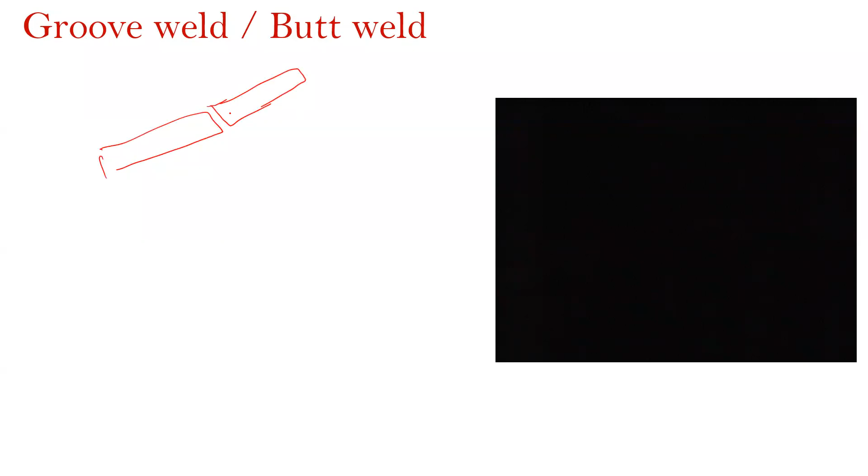Now, here we are not going to provide any cover plates in the welded connection. Instead, we are going to bring the two main plates very close to each other, with a little gap between them, so they are not completely attached like in the second diagram. So this is not done in the welded connection.

Instead, in the welded connection, we bring the two main plates close to each other, and in this gap that you are seeing, we are going to fill the weld material. This is all the weld material which we provide. So such a connection is called a butt weld or groove weld.

So in a butt weld or groove weld, two plates are brought close together without touching the faces or edges of each plate. The two main plates are brought close to each other, and in the gap between them, we provide the weld material - hence this connection is called a groove weld or butt weld. Here again, different types of butt welds are available, just as we saw single cover and double cover butt joints in bolted connections. In welded connections too, there are approximately 7 to 8 different types of butt welds available.

So before getting into those types, I'll show you an image - a video about the butt weld. Here in the video, you can see two pipes - this is pipe 1 and this is pipe 2. These two pipes are brought close together, in such a way that there is a small gap between them. You can see the line there...

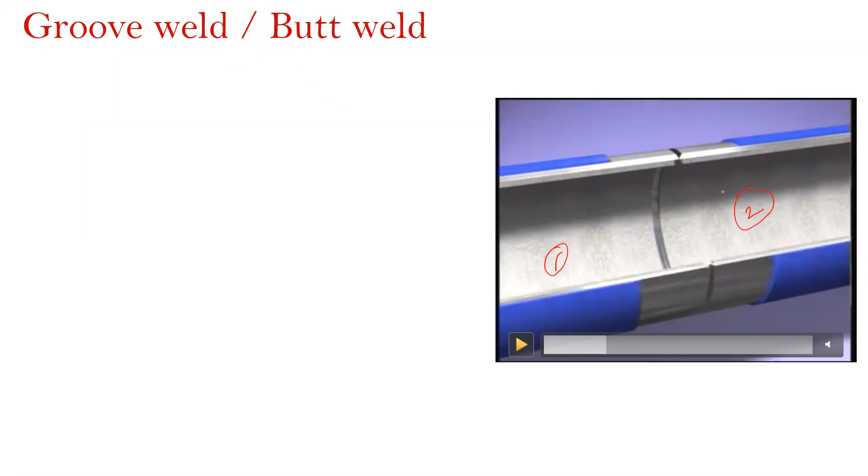As I was telling earlier, you have two plates or two pipes in this video - this one is pipe 1 and this one is pipe 2. These two pipes are brought very close to each other, and between them there is a very finite, very small amount of gap. In that gap, you can see in the video, the welding is being done - all the sparks you are observing. That's how the butt weld or groove weld is made.

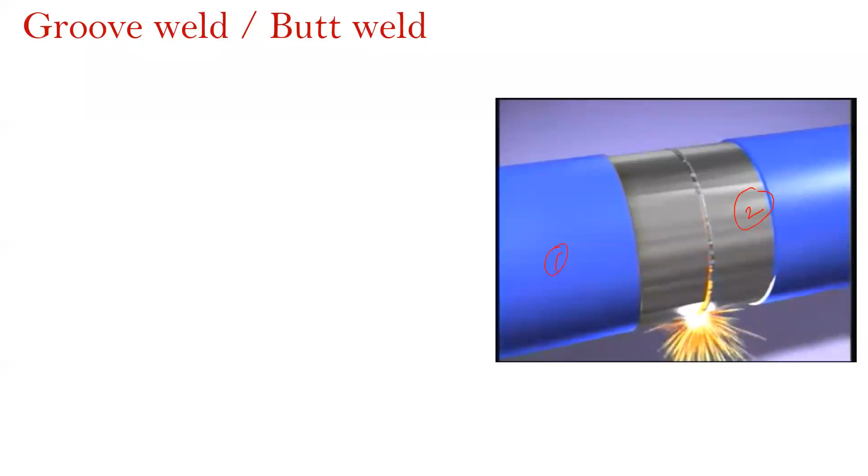So two plates are brought close to each other, and in the gap between these two plates, the welded connection is provided - hence it is called a butt weld or groove weld. That's the definition of butt weld. Now let's talk about the specific requirements of a butt weld. This butt weld or groove weld is used when the members are in the same plane. What does this mean?

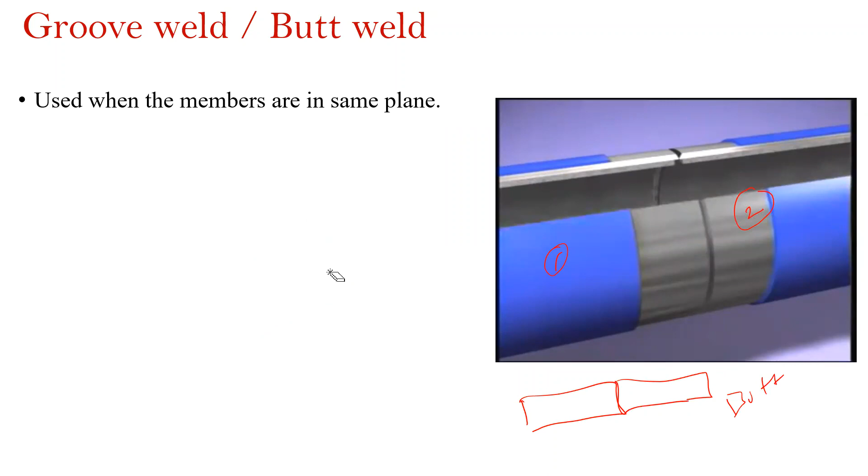Same plane, in the sense, say you have one plate here and you keep the other plate in the same plane. Whereas in the lap joint, you can provide one plate in this way and the other plate in the perpendicular direction. This is applicable for lap joint and this is applicable for the butt joint or butt weld. So anything is the same. The term groove weld is specifically used when the two members are in the same plane.

This butt weld doesn't give more efficiency by itself. What happens is, in a butt weld, as I said earlier, in between the gaps of the two plates you are going to fill the weld material. But before filling the weld material, you have to make sure whether the edge surface of both the plates is properly cleaned or not. So that's how edge preparation is required in butt welds.

Whereas in lap welds, you don't need any edge preparation, because in lap joint connections you are simply going to provide the lap connection. Edge preparation means removing any dust or rust material present on the surface. This has to be done both in lap weld and butt weld, but in butt weld it has to be done more concentratedly. So the effect of edge preparation is more significant in butt weld, and hence it adds some additional cost to making butt weld joints.

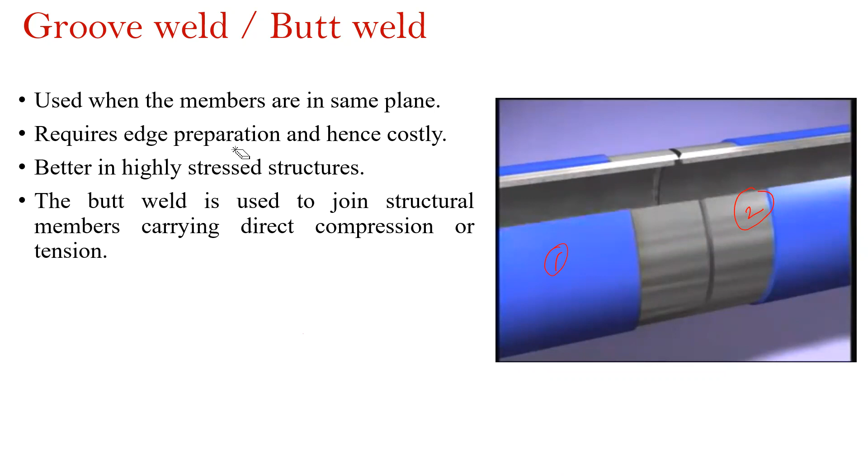Here we have different types of butt welds: single V butt weld, single U, single J, and double V, double U, double J. These are the different types of butt welds. I'll talk about those types in later slides. But what you have to remember is that single V, single U, or single J butt welds are much cheaper compared to double V, double U, and double J.

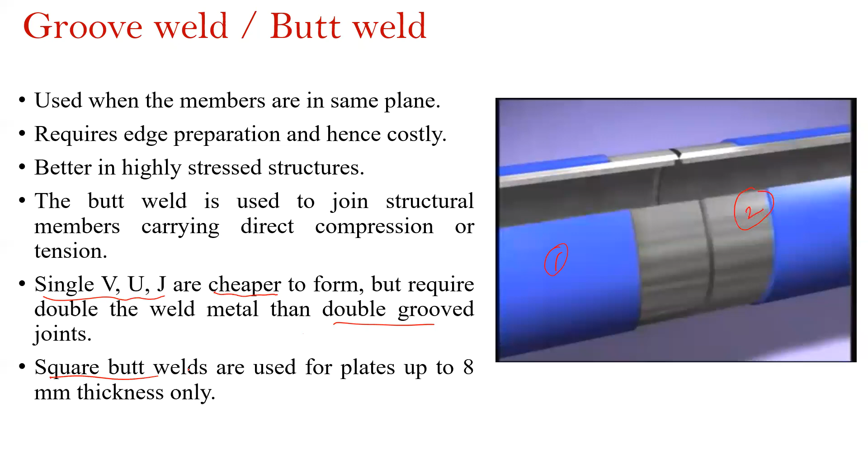Square butt welds are used for plates up to 8 mm thickness only. I'll talk about square butt welds a little later, but remember, square butt welds are used for plates up to 8 mm thickness. So you can make a square butt weld only when the thickness of the plates is less than or equal to 8 mm. Now let's talk about the different types of butt welds.

The first type of butt weld is the square butt weld. In a square butt weld, you have two main plates, main plate 1 and main plate 2, and in between these two main plates, you are going to provide the weld, shown as the hatched portion. Now, how will you identify whether this type of weld is a square butt weld or not? The simple identification factor is that you have two plates, main plate 1 and main plate 2.

If both edges of the plates are perfectly straight, then such kind of butt weld is called a square butt weld. We are not going to talk about the shape of the weld itself. You might have a doubt that since the shape of the weld is not square, it is not a square butt weld, but that's not the case. The square butt weld or square groove weld is a type of weld when the edges of both plates are perfectly straight. That's how you define the square butt weld condition.

Here two pieces, flat and parallel to each other, are welded. They are not exactly square, this can be a rectangle also, but what it has to form is perfectly straight lines at the edges of the plates, and hence we call it square butt weld.

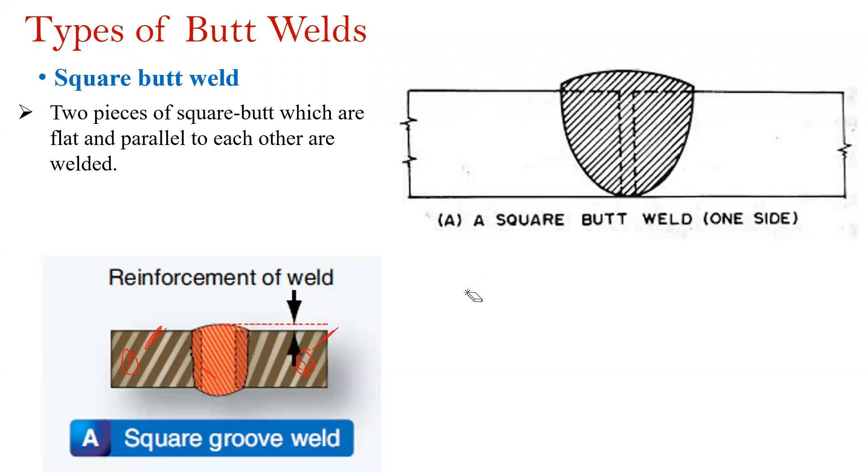Now we have two different types of square butt welds: single square butt weld and double side square butt weld. As you see in the second figure, the single square butt weld is a weld where you do the welding process from top to bottom.

This means initially you fill the weld material here, and then you continue filling from here on, so this process is initiated from top to bottom. The initial portion where you weld is here, and from here you increase the diameter of the weld to make the square butt weld. This is single side square butt weld.

In double square butt weld, you weld from the top and also from the bottom. You can see the weld portion at the top, and also the weld portion from the bottom as well. The double side square butt weld is more efficient compared to the single square butt weld.

This is because in single side square butt weld, if you observe the perimeter of the weld material, it is very less in the first portion. But in the second portion, it is relatively high compared to the first one, and hence this is the better performer of the two types of square butt welds.

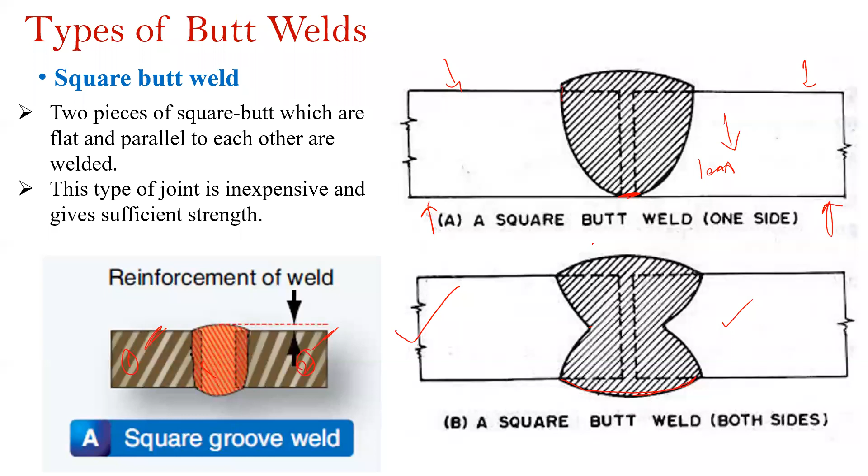As I said earlier, this type of joint is inexpensive and gives sufficient amount of strength. So the next type of butt weld is V butt weld or V groove weld. I can use groove or butt interchangeably, they both represent the same thing.

Here in the V groove weld or V butt weld, you have two main plates as shown in the figure. When the edges of the main plates are perfectly straight, you call them square butt welds. But here the edges of both plates are in the shape of a V. So when you find the V shape at the center of the connection, you call such weld a V groove weld.

Now you might ask what this angle should be. As shown here, the angle has to be 60 degrees.

Now, where you fill the weld: in a square butt weld, you fill the weld in this portion. Whereas in the V groove weld, you fill the weld material in the V shape. So that's about the V groove butt weld.

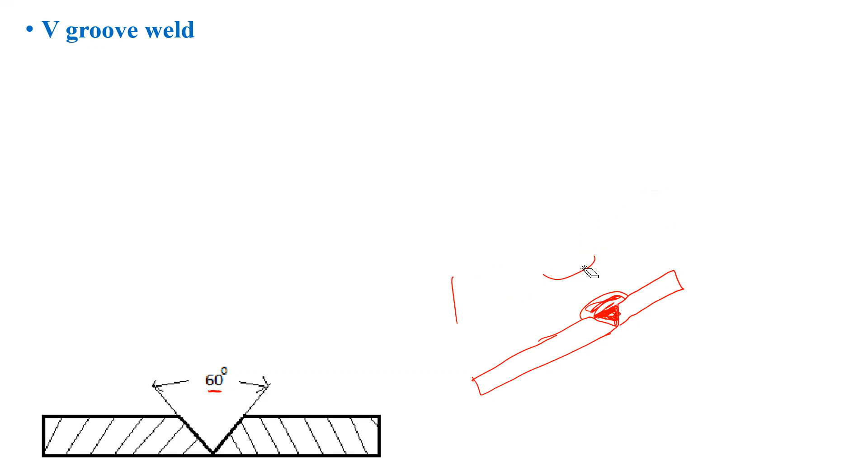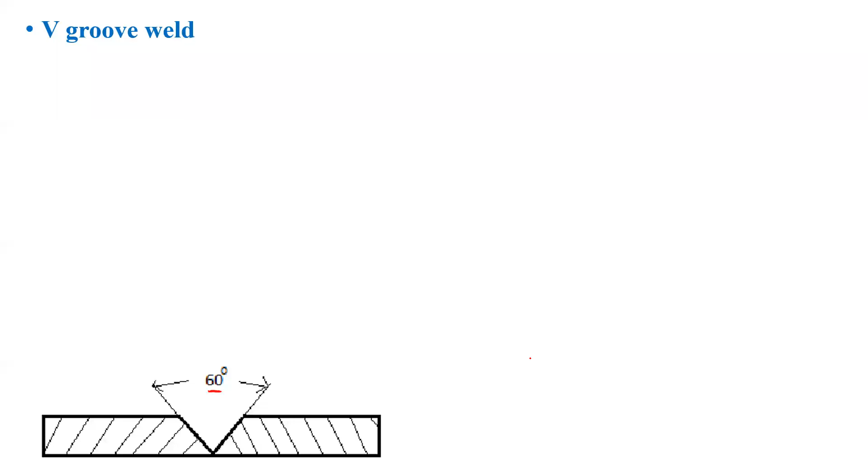So the V groove weld can be defined as when the edges of the plates form a V shape at an angle of 60 degrees. Based on the shape, we call this weld type a V groove weld. Now here also we have two types of V groove welds.

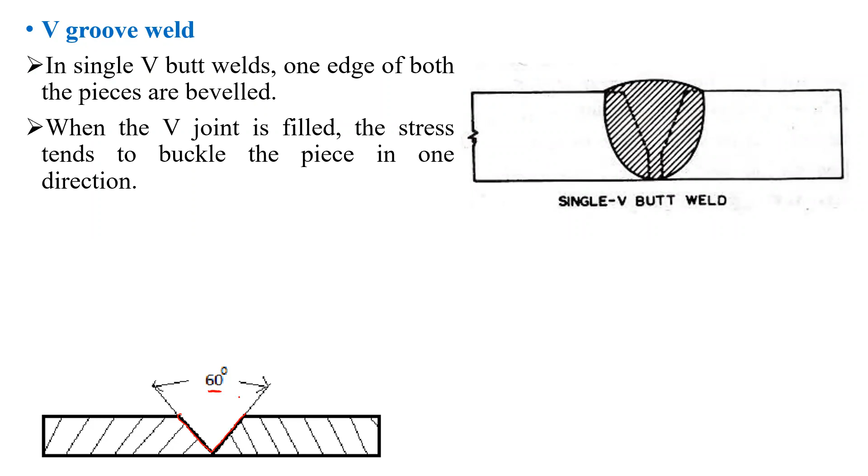One is the single V groove weld and the second is the double V groove weld. We'll talk about these points later, but let's understand the single V and double V groove welds. In the single V groove weld, you make the two plates in the shape of V. It is not that we have to make the complete plates that way.

I'll show you here. You are not going to make the V shape throughout the depth of the plate. Here you can see throughout the depth of the shape you can find the V shape. But why we do it this way, as shown in the top figure—just give me a second—is because if I try to fill the weld throughout this portion, it gives a better efficiency.

If you make the groove completely throughout the depth of the web or the plates, you can still provide the weld, there's no issue in that. But as soon as you apply load from the top or bottom, this is the first portion that gets failed. That means the second approach gives better efficiency compared to the first one. For your understanding, I've shown the figure in the shape of V, but this V shape cannot be done throughout the depth of the plates.

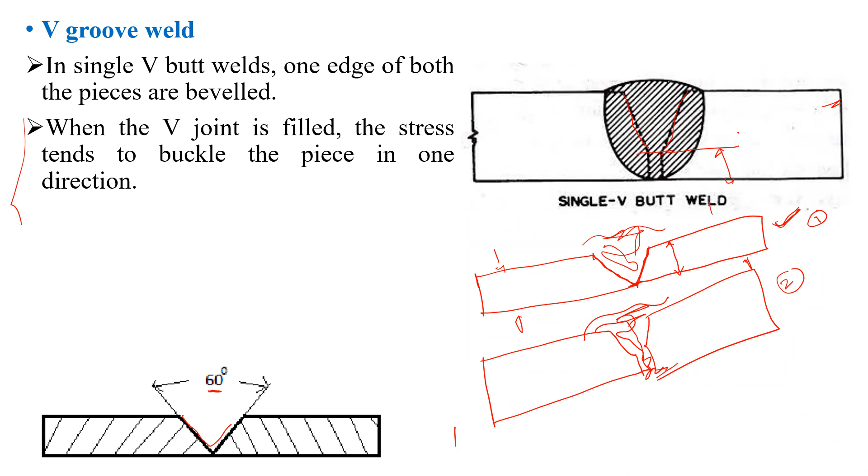This has to be only up to a certain depth. What should this depth be? We'll discuss this when talking about the IS code provisions—they aren't in IS 800/2007. We have to use another code book for that, but it's just for remembrance purpose, not useful for your grade of study. So, this is what the single groove butt weld, or single V groove butt weld, is.

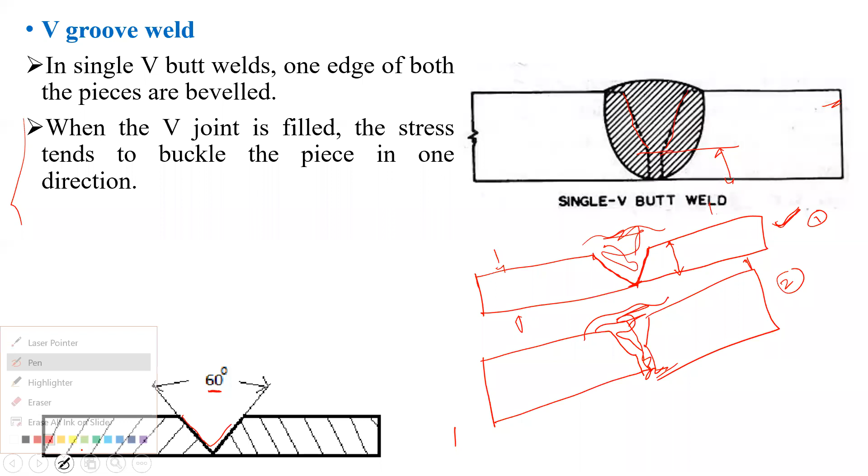Now the double V groove butt weld: here you make the V shape for both sides of both plates. On the top you have a V groove, and on the bottom you also have an inverted V groove. So you have a V shape at the top and a V shape at the bottom, or inverted V shape. In this entire portion, you fill the weld materials.

As we saw with the double square and single square butt welds, here also the double V butt joint is more efficient compared to the single V butt joint or butt weld. This cutting portion, where you cut the shape in the form of V, is particularly called beveling.

Beveling - both sides of the main plates are beveled in the shape of V. That particular terminology is called beveled or beveling.

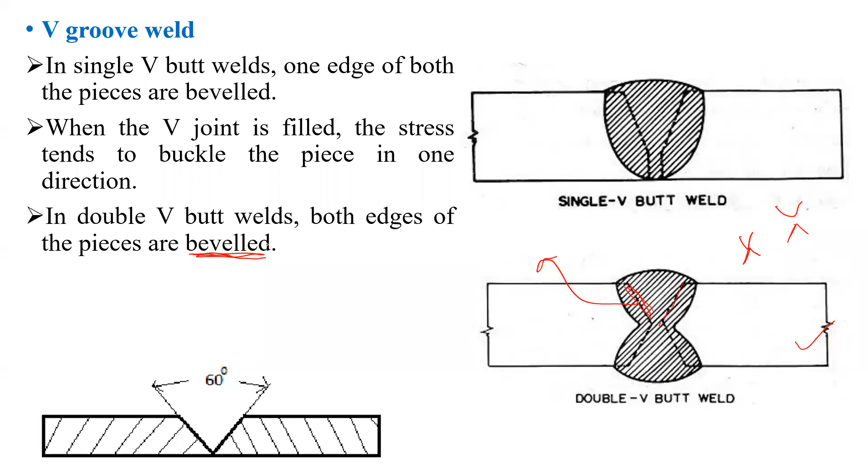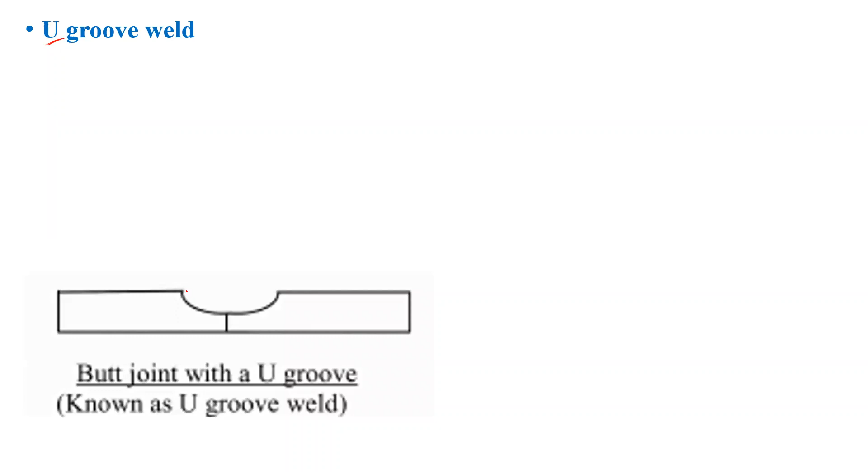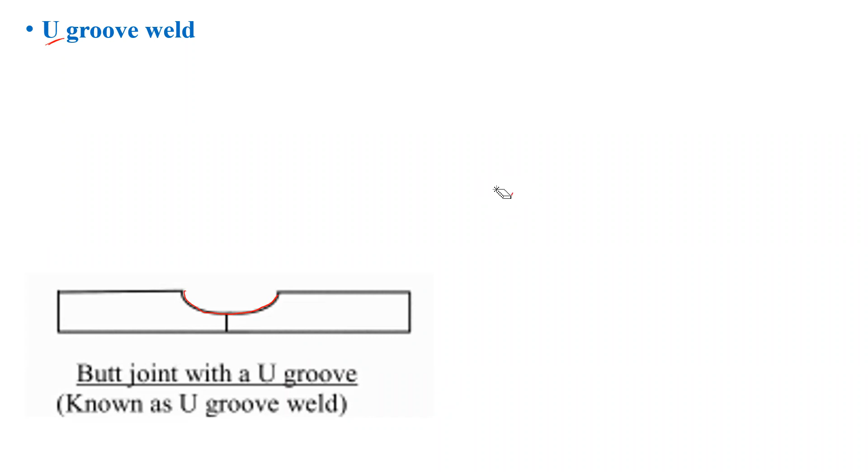Now the third type of butt weld is U-groove weld. As the name itself says, this type of weld will be available in the shape of U - more or less a U shape, not exactly like this but close. Hence you call this kind of weld a U-groove weld. And here we have two types: single U butt weld and double U butt weld.

The same philosophy applies here. In single U butt weld, you have the U shape of the plates only on one side, whereas in the double U butt weld, you have the U shape both on the top as well as on the bottom. That's what the U-groove butt welds are.

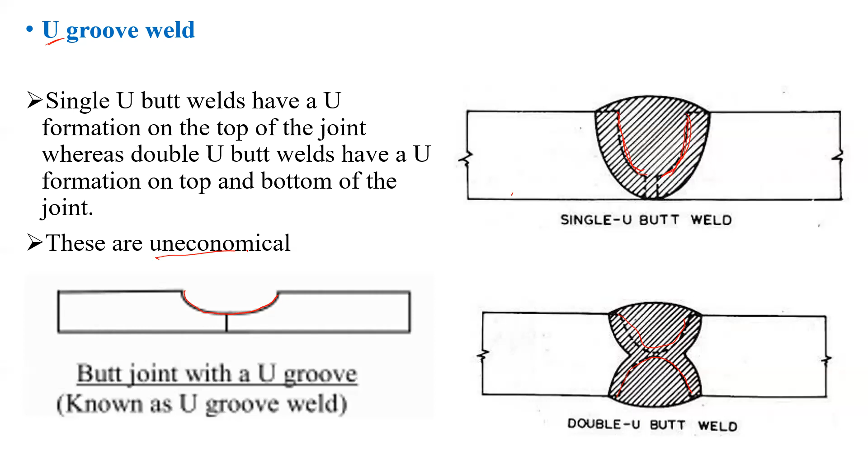These kind of butt welds are very uneconomical, so they give high cost to the construction. Why? Because special care has to be taken in forming this radius or curve. Making this curve is technically a little difficult for laymen, so it requires special workers to make this kind of groove in the shape of V or U, and since it's difficult for general workers or laborers, it becomes little uneconomical in terms of cost.

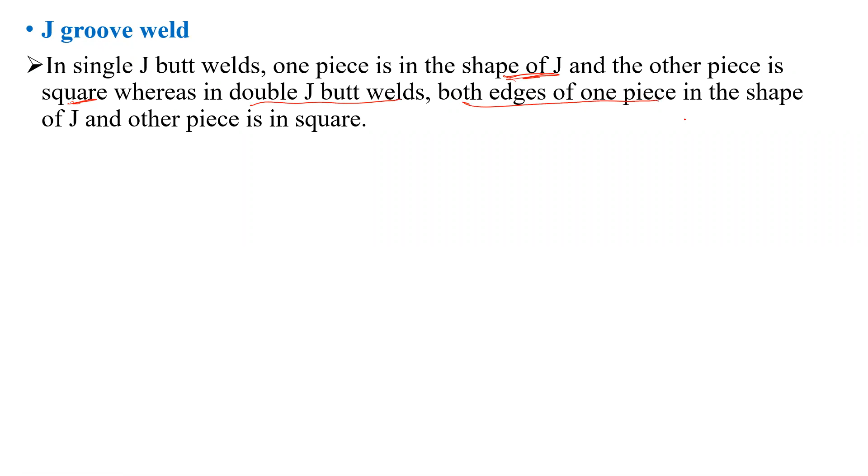The next type of butt weld is J-groove butt weld. The J-groove butt weld will be there in the shape of J. In single J butt welds, one piece is in the shape of J and the other piece is square. Remember, one piece is in the shape of J and the other piece is square. Whereas in double J butt welds, both the edges of one piece are in the shape of J.

I'll show you the figures. This is single J butt weld - you can find the shape J here, more or less, not exactly but similar. One plate is forming the shape J and the other plate is perfectly straight or square. So in single J butt welds, one piece is in the shape of J and the other piece is in the shape of square, perfectly straight.

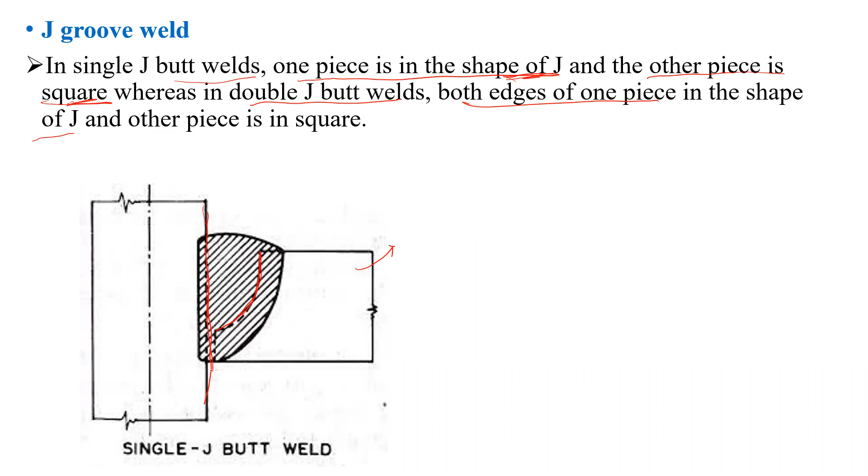So what you have to remember is that whether in single J butt weld or double J butt weld, it is provided only for one plate, not for both plates. One plate will be perfectly square both in single J and double J, while the other plate has the shape of J. If you find only one shape at the top, you call it single J, and if you find the shape of J at the top as well as at the bottom, you call it double J butt weld. That's the simple difference between single J and double J butt welds.

This type is also expensive and can be produced only with special cutting machinery. As I said earlier, the reason it's not economical is because of the radius or radial angle - here also you find an arc shape. That's why it has also got a little expensive, and it requires special machinery for cutting this kind of weld.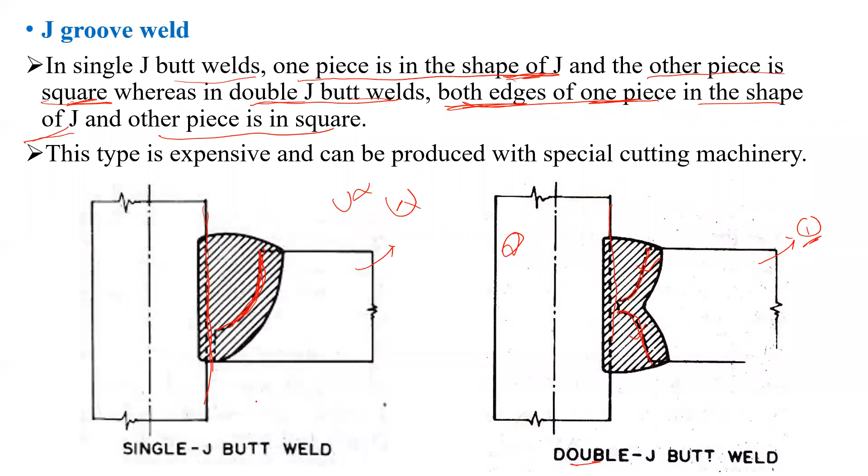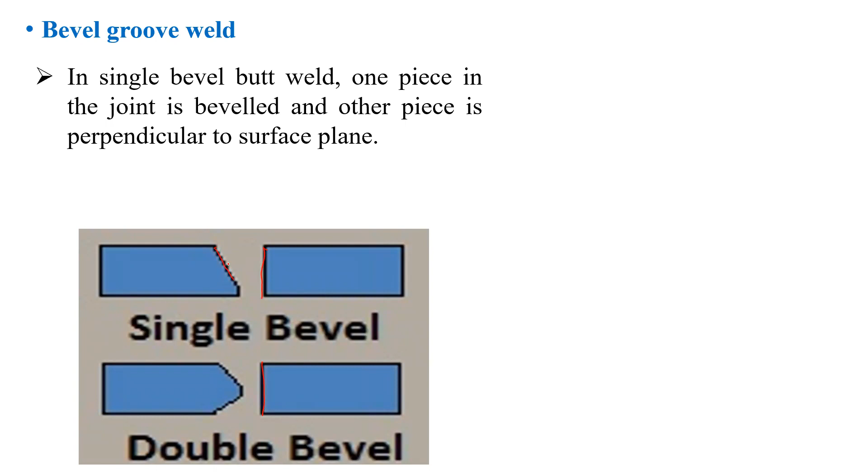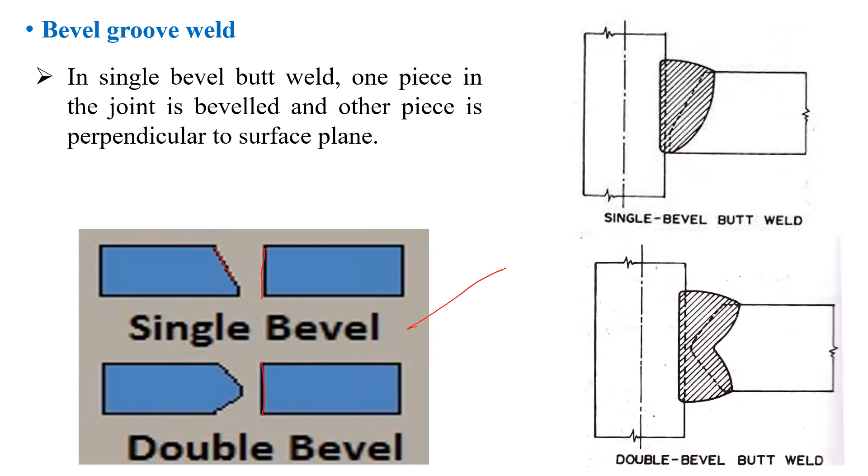This is the same as in the J groove butt weld. In J groove you found the same thing, right? As you see here, you can find the same pattern. One of the plates is perfectly squared, whether in single J or double J. The same pattern applies here: in single bevel and double bevel, one plate remains perfectly straight or square, while beveling is done on one side, or on both sides of the same plate. Depending on the beveling process, you call this weld a single bevel butt weld or double bevel butt weld. Here you can see the beveling process, the same figure, just a replica of these two figures.

So let's look at the summary of what we've discussed so far, all the different types of groove welds or butt welds. Initially we talked about the square butt weld, where both sides are perfectly square or straight. Closed square is when you avoid the gap between the two plates, so you use a closed square butt weld. However, this is very limited and cannot be used at all places.

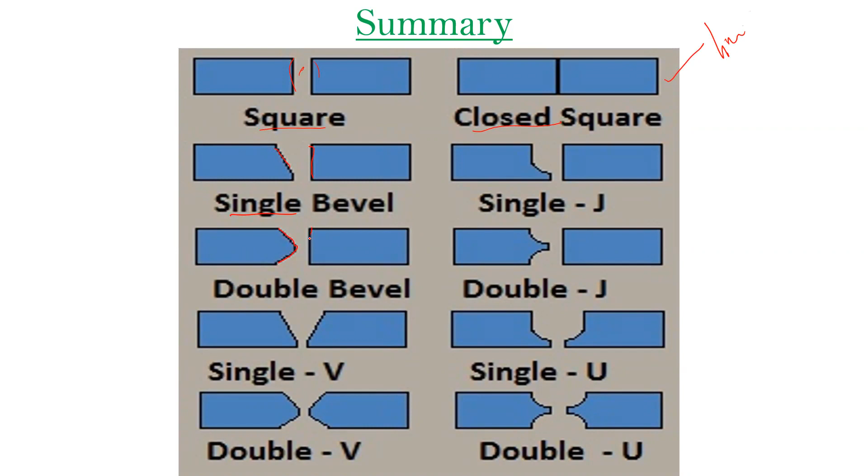The next thing we talked about is single bevel, where you bevel one of the plates only on one side, and the other side remains square. In double bevel, you make the beveling process on both sides of the same plate, and the other plate remains square. In single V, you make both plates form a V shape. In double V, you make both plates on both sides into a V shape. Single J and double J are however the same as single and double bevel, just the shape is different.

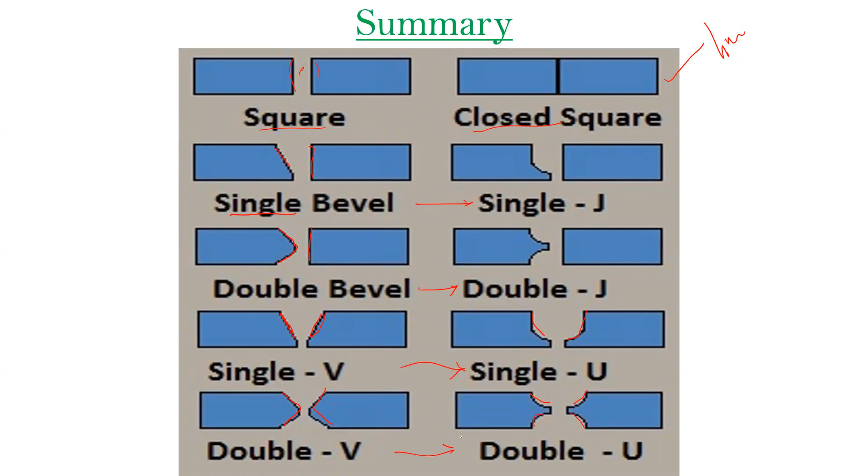In single U, you make the shape of U for both plates, and in double U, you make the U shape on both sides of both plates. However, single V, single U, double V, and double U are also essentially the same. So this is the summary of the different types of groove welds we've discussed so far.

Now we have to talk about one important thing here: complete penetration and incomplete penetration. What is this? I'll show a figure. Say, for example, I am using V groove welds. This is single V groove weld, and I'm also going to draw the double V groove weld. This is single V, and this is double V.

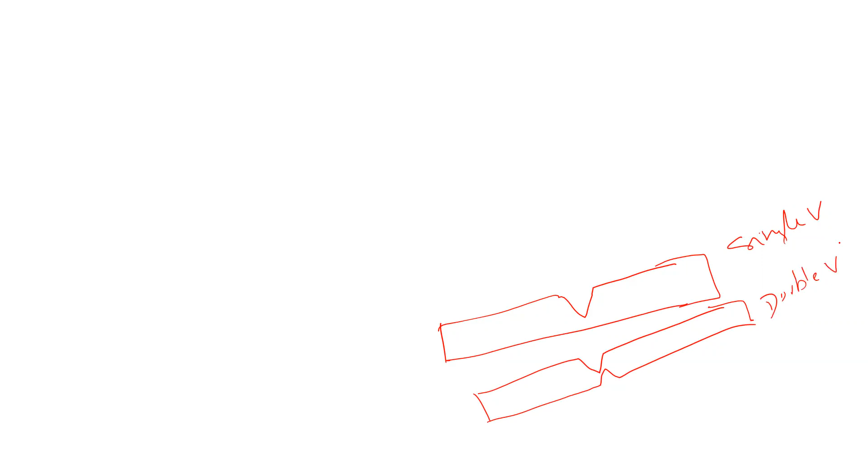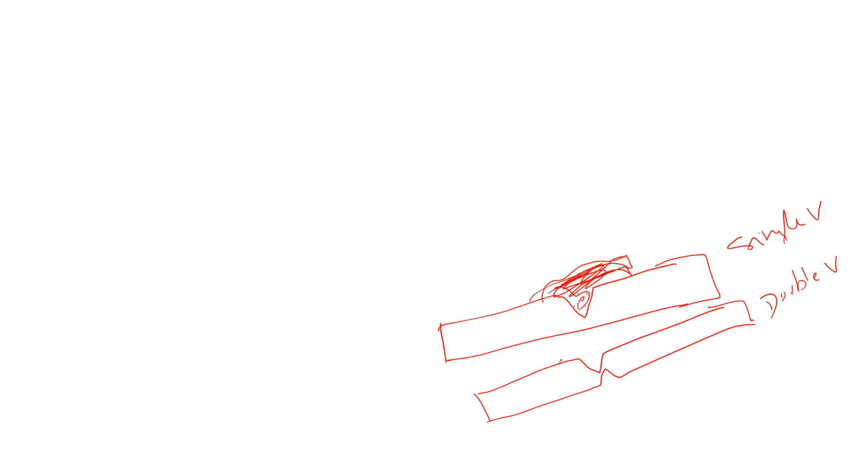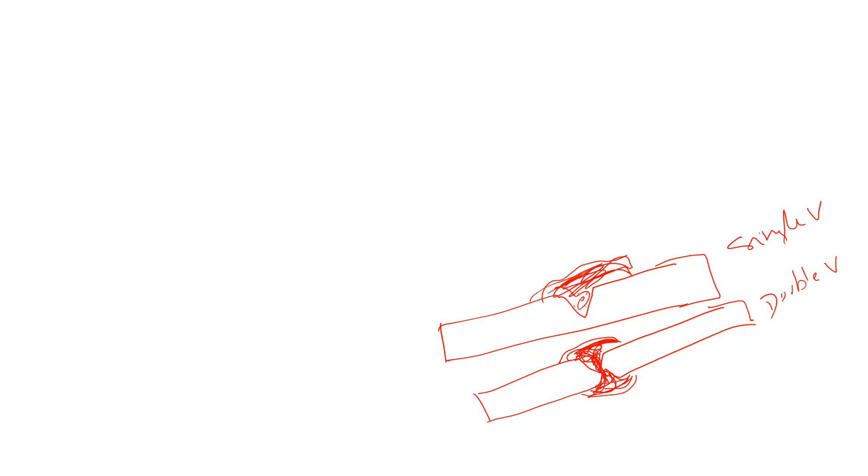Now, as I said earlier, you are going to fill the weld material up to here. This is how welding happens in single V butt weld. Whereas in double V butt weld, the weld material is almost passing through the entire depth of the connection or entire depth of the plates. In double V butt weld, the weld material passes throughout the depth of the main plate, but in single V butt weld, it passes only up to a certain extent.

So this is called incomplete penetration, meaning the welding does not properly go throughout the depth of the plate. Whereas here, you call it complete penetration. So that's incomplete and complete penetration.

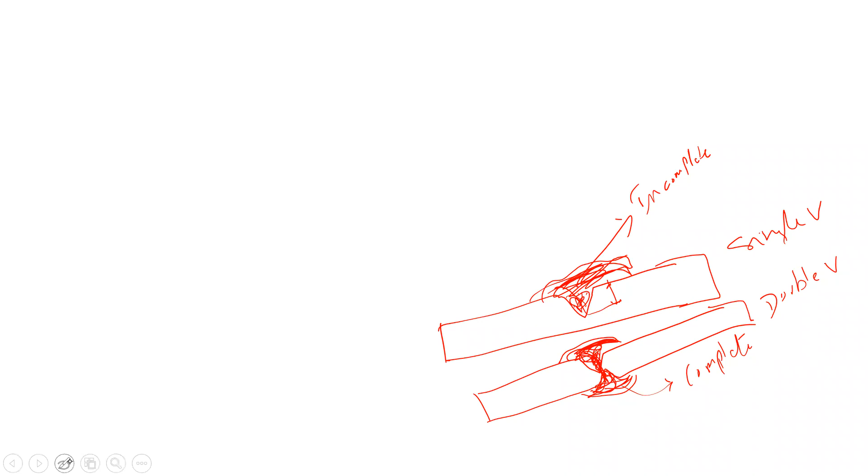The weld is not completely passing throughout the depth of the plates. Thus, this portion is getting little unsafe. That means there is a probability of chances to get fail at this portion. This is called incomplete penetration.

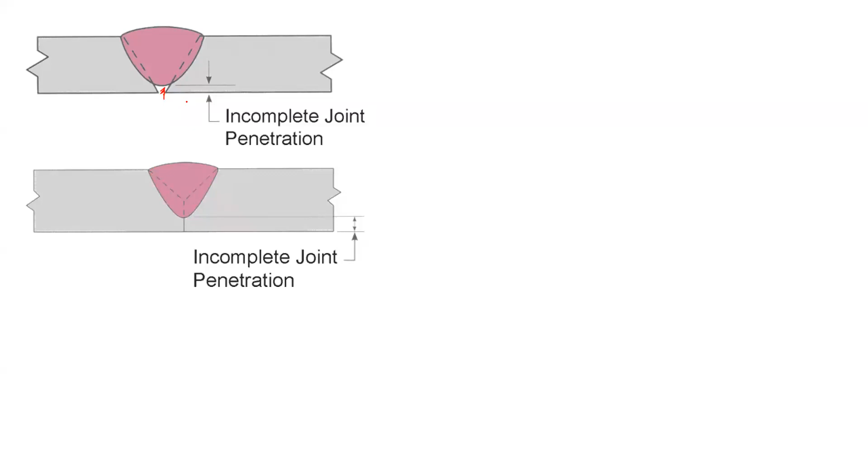This also shows about the incomplete penetration, but this talks about the U joint. This is in the shape of U, and the top one is in the shape of V. They both, however, are the same.

But what you have to observe is, in single V, single U, or single J butt welds, incomplete penetration of welds takes place. Whereas in double V, double U, or double J butt welds, complete penetration of weld is happening. In single V, U, and J, make sure of noting these points: incomplete penetration occurs, whereas in double V, double U, and double J butt welds, complete penetration of weld takes place.

Now, what difference does this make while solving problems or designing connections? Which one, according to you, will be safer? When you have complete penetration in the welds, you can call it a safer joint compared to incomplete penetration. When the complete weld material is passing throughout the depth of the plate, such connections are much safer compared to the other types.

So you can simply say the single V, single U, and single J butt welds are a little more unsafe compared to the double V, double U, and double J butt welds. This makes a difference in the calculation of throat thickness. We have talked about this throat thickness in the previous class. What is this throat thickness?

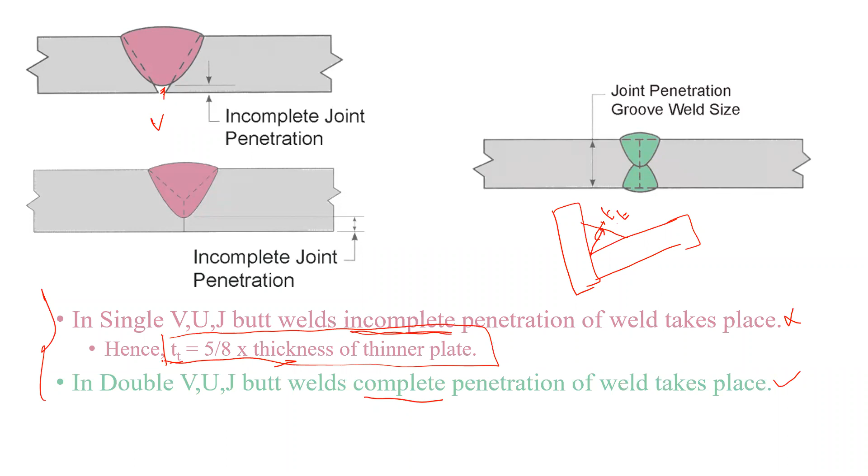is taken as 5/8 times the thickness of the thinner plate. This is taken as 5/8 times thickness of thinner plate. But whereas in double V, U, J butt welds, the throat thickness is taken as just the thickness of the thinner plate. So these two points are very important.

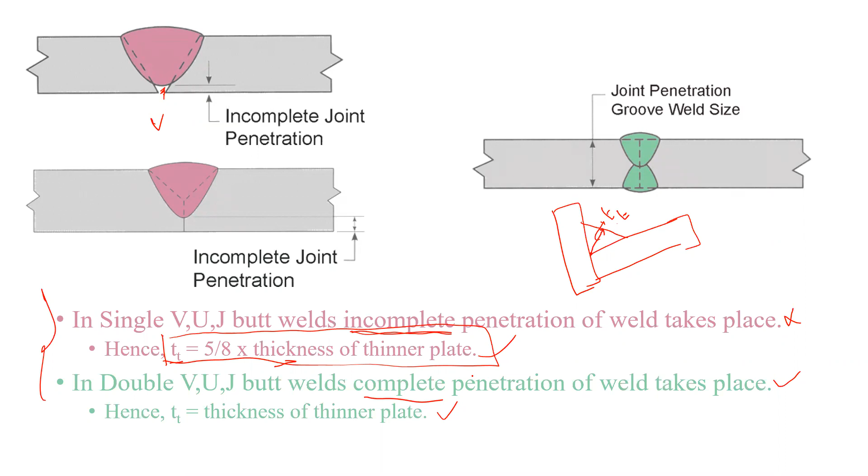You have to make a note of this. In single V, U, J butt welds, since incomplete penetration is happening, the throat thickness is taken as 5/8 times the thickness of thinner plate. Whereas in double V, double U, and double J butt welds, you take the throat thickness as the thickness of the thinner plate. That's the simple difference between single V, single U, single J, and double V, double U, double J. So that's about the complete and incomplete penetration of welds.

This is also a summary which talks about the different types of welds which we have seen so far. This gives a broader detail of all the things which we have talked about.

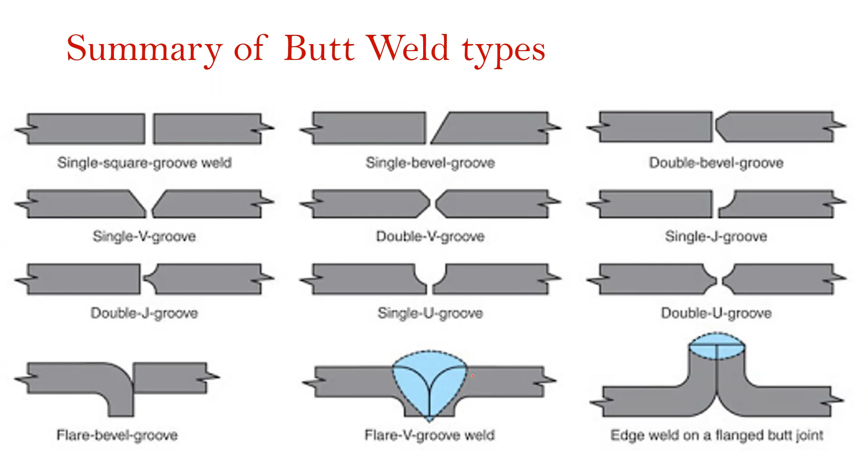Let's look at the specifications of the butt welds. Whatever specifications you are seeing, I request you to note down all the things, because all the specifications are not available in your IS 800/2007. So for that reason, if you make a note while solving problems, it gets easy to refer.

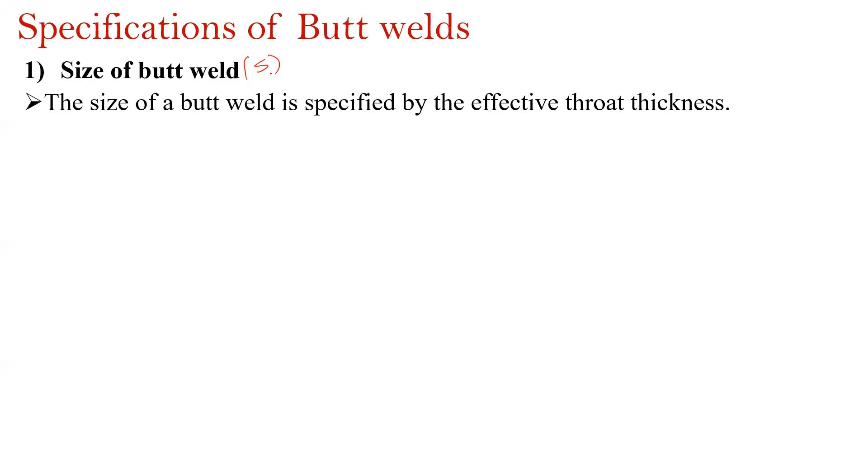So the first one is the size of the butt weld. The size is denoted with the symbol capital S, as we denoted in the lap weld. Here, the size of butt weld is specified by the effective throat thickness. Remember, the size of butt weld depends on the effective throat thickness, and the effective throat thickness in case of complete penetration is taken as the thickness of the thinner part.

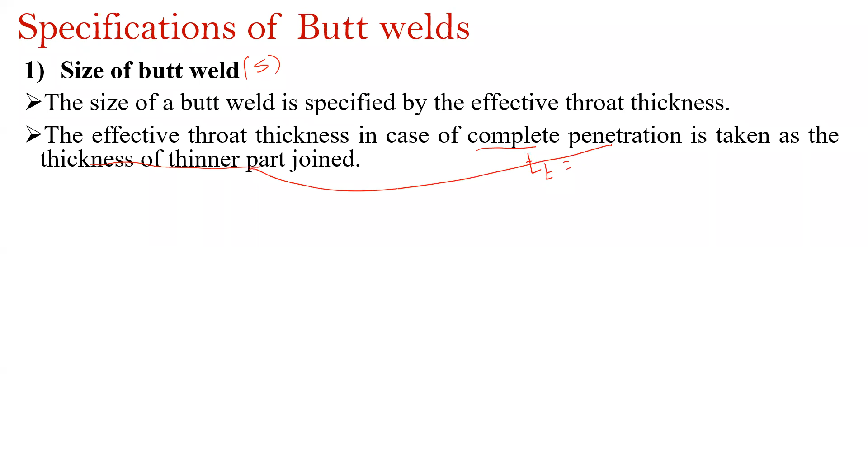I have shown you this in the last slide - if you have complete penetration, the effective throat thickness is taken as the thickness of the thinner plate. This thickness of the thinner plate is taken as the effective throat thickness in case of complete penetration. But in case of incomplete penetration, it is taken as 5/8 times the thickness of thinner plate.

The effective throat thickness in case of incomplete penetration is taken as 7/8 times thickness of thinner part. But for the purpose of stress calculation, this value of 7/8 has come down to 5/8 times thickness of thinner part. So you have to consider this value, 5/8 times thickness of thinner part.

Therefore, when you have incomplete penetration and want to find out the stress values, you have to use the throat thickness, which should not exceed 5/8 times thickness of thinner part. So in incomplete penetration, the throat thickness is taken as 5/8 times of T, thickness of thinner plate. This is the important value to remember, not the 7/8 times thickness of thinner part.

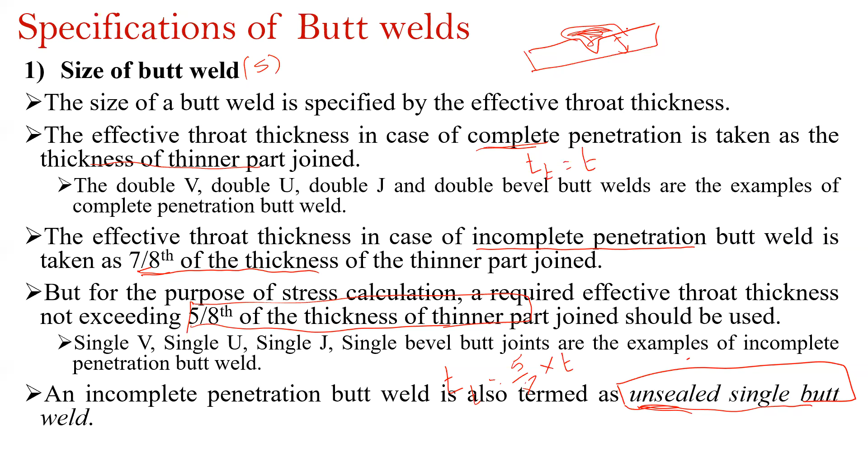Now the next parameter is the effective area of butt weld. The effective area of butt weld is taken as the product of throat thickness and the effective length, which is called LW or L effective - they are both the same. So the effective area of butt weld is the product of throat thickness and effective length, denoted with LW or L eff, effective.

Next, how will you find out this effective length? The effective length of butt weld is the minimum length of butt weld, which shall be 4 times the size of weld. So the minimum effective length, L effective minimum, equals 4 times the size of weld, or 4 times S, where S is called the size of weld. So the minimum effective length of butt weld has to be 4 times the size of weld.

But the effective length of butt weld shall be taken as the full length of weld, or length of full size weld. I'll talk about this when we discuss the problem, in the second step. But for now, remember this specification: the minimum effective length equals 4 times the size of weld.

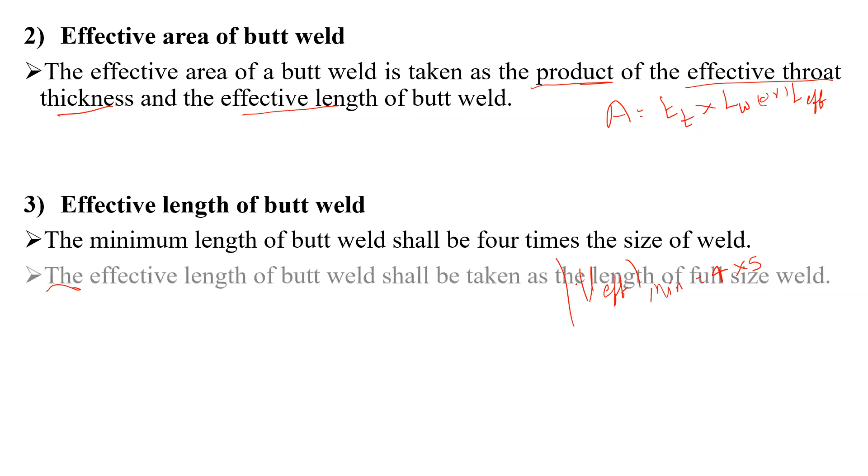Now the next specification is design strength of groove weld. This is another parameter, the design strength of groove weld. Here the design strength is denoted with Tdw - sometimes PW, and sometimes we will refer to other parameters also, which I'll talk about a little later. The design strength of groove weld depends on two important phenomena: one is either tension or compression, and the second phenomenon is shear. So before we talk about shear, let's finish off with tension or compression.

So what does this say? Suppose you have two plates - forget about which kind of butt weld it is, it can be single V, double V, whatever. Let's have two plates which are about to make the butt weld. Here, if you find the tensile forces on either side of the plates, or the compressive forces on either side of the plates, then the design strength is calculated using this formula.

Okay, so if you have a plate experiencing tensile or compressive forces, the design strength of a groove weld is taken as Fy into Lw into Tt upon gamma Mw. Fy is the smaller of yield stress of weld and parent metal, that is 250. You can take the Fy value as 250; while solving problems you will get to know how to take the Fyw value and Fy value. That's about the design strength of groove weld when experiencing tensile or compressive force. Here, the value of Fy for the time being you can remember as 250 megapascals, as we have been following since the bolted connections design.

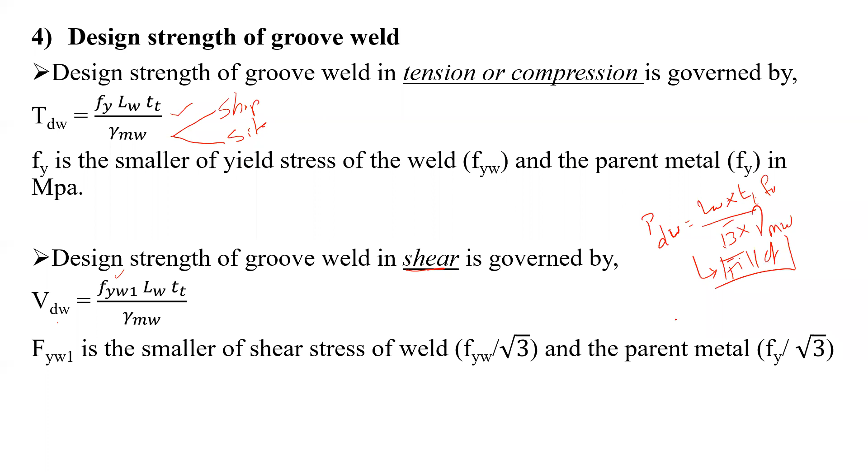Whereas if you remember the concept of design strength of fillet weld, the design strength, that is Pw or Pdw, is taken as Lw into Tt into Fu by root 3 into gamma Mw. This is in case of fillet weld, which we talked about in the last class. So in the calculation of groove weld, the design strength depends on two parameters: tensile or compressive force, and shear force. Whereas in fillet welds, you don't consider which type of force is experiencing on the member; all forces have the same calculation of design strength.

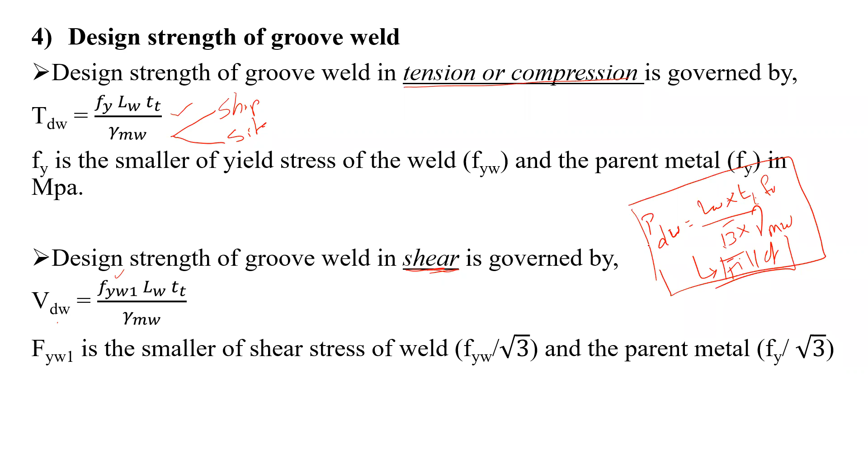So this is the next classification or specification of butt welds or groove welds. The next type of weld is the slot weld. We have seen fillet welds, we have seen butt welds, and the third category is the slot weld. We have one more type, the plug weld, that we'll see once we complete this one. So what is this slot weld? A slot weld joins the surface of a piece of material to another piece.

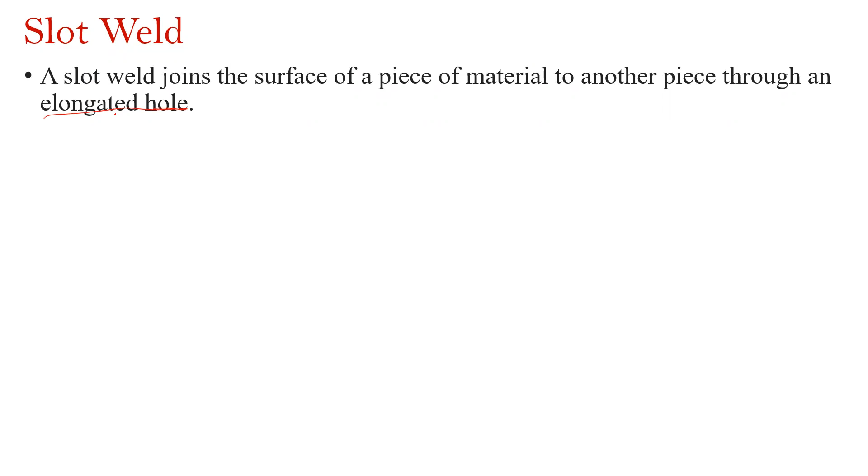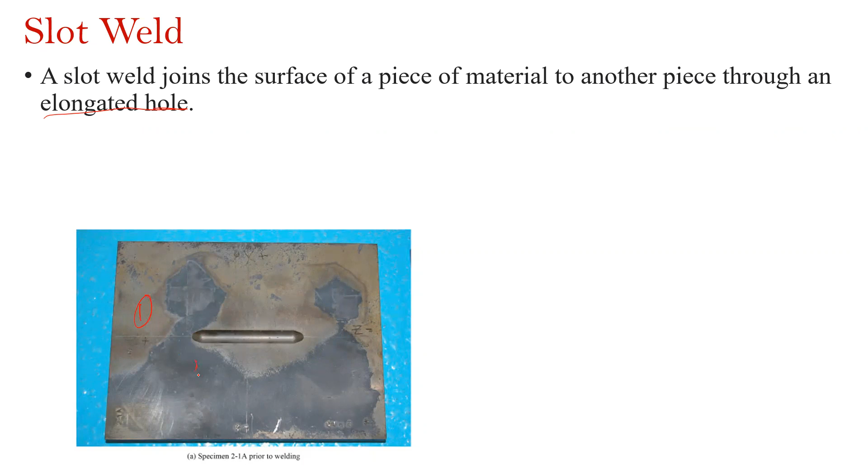That's very common - the surface of one piece is joined to the surface of another piece. But how do you join them? You join by using an elongated hole which is created on one of the plates. So one plate is joined with the other plate, through the hole created on one of the plates. I'll show you the images, then you can see. Here you can see this is one complete plate, plate 1. And in this plate, you have a slot, meaning a small hole having a particular length, which you can call L.

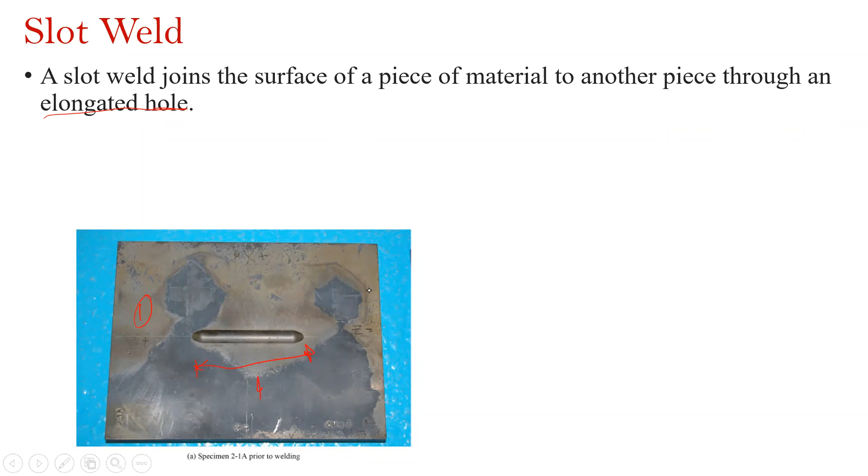And on this plate, you're going to provide another plate, and then you're going to weld. You can see here, for the other plate also you're going to have the weld. So in this connection, or in this slot, you're going to fill the weld material. That's how you join the two plates. So that's about the slot weld - you have an elongated hole, and in this elongated hole, you fill the weld material.

So that's about the slot weld. This hole may be open at one end and may be partially or completely filled with the weld material. There is no strict rule that throughout the length of the hole you are going to provide the weld material. You can provide up to a certain distance and leave the rest without making any weld.

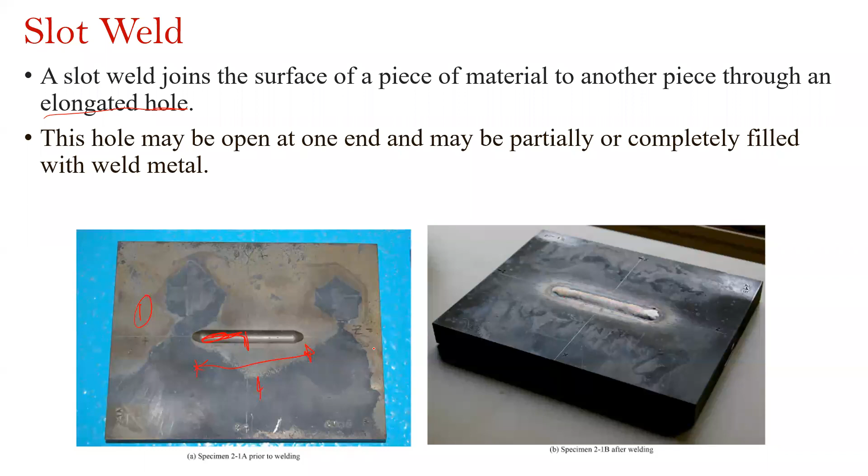But slot welds are technically not as efficient when compared with the first two types of welds, that is the fillet welds and the butt welds.

And the width of the slot has to be taken between two terms: either 3T or 25mm, whichever is greater. So this length has to be 3T or 25mm, whichever is greater. So that's about the slot welds.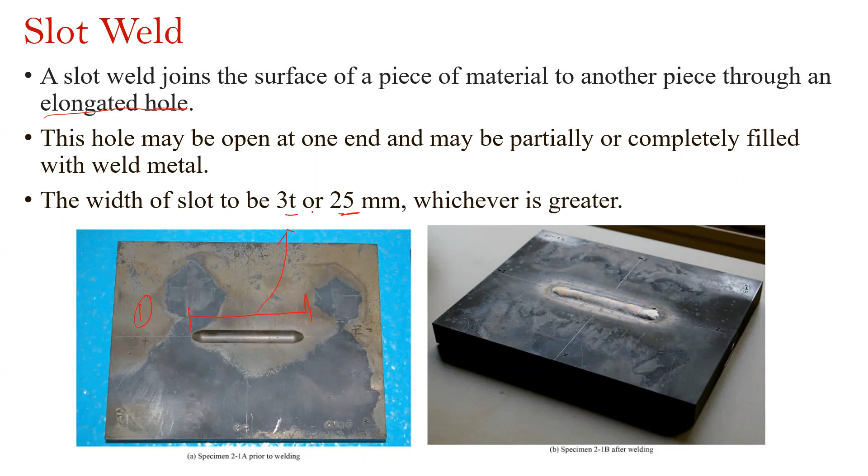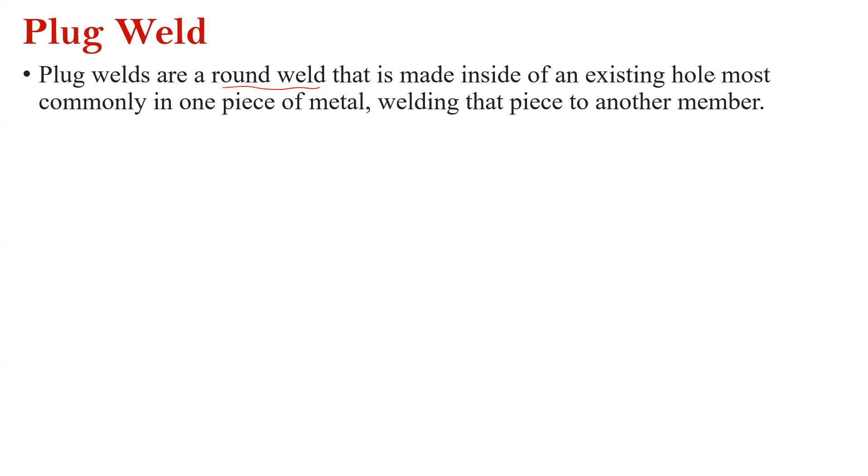The next classification of weld is the plug weld. In plug welds, you are going to have the welds in the shape of plugs. Plug welds are round welds made inside an existing hole, most commonly in one piece of metal. I'll show the image so you can understand.

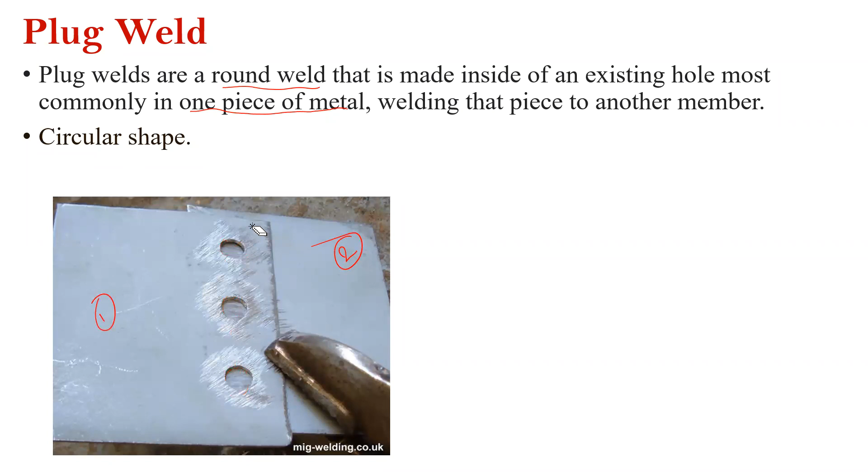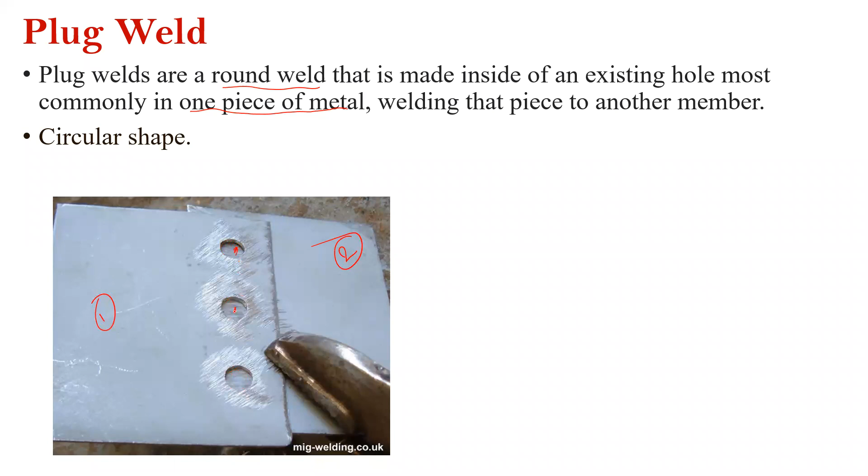So here, before the welding process, you are going to make the plugs or holes. You make holes for only one of the plates, not for both. Remember, this is only for one plate. Then in these holes you are going to fill the weld material, so that you can see in this figure. The holes are completely filled with the weld material.

So where will you use this kind of welded connection? This kind of welded connection is used when you don't want to provide riveted connections. Riveted connections are not as efficient as bolted connections and welded connections. So instead of riveted connections, where certain amounts of loads are heavy, you can make plug welds. That's what it talks about.

Such welds are often used in place of rivets, and usually these plug welds are in the shape of circular welds. So that's about the different types of welds which we have seen from the last class. The first one is the fillet weld or lap weld. The second one is the butt weld or the groove weld. The third one is slot weld, and the last one is plug welds.

So we have very little specifications regarding slot and plug welds. One of the specifications for slot weld is you have to make it 3T or 25mm, which is the width of the slot weld. But for plug welds, there are no strict rules about the diameter of the holes or other things. However, we'll talk about the specifications regarding these plug welds and slot welds once we do problems related to these concepts.

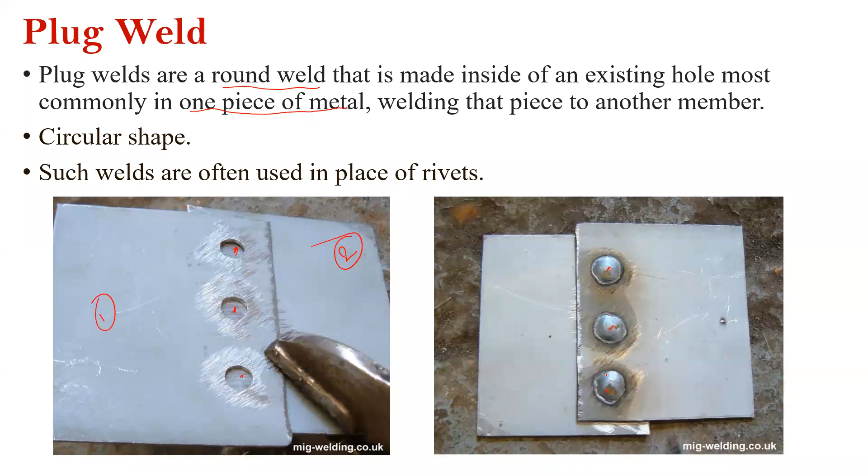So now let's look at another type of classification of welds, which is based on position of weld. You have the flat weld, horizontal weld, vertical weld, and overhead weld. These are the four types.

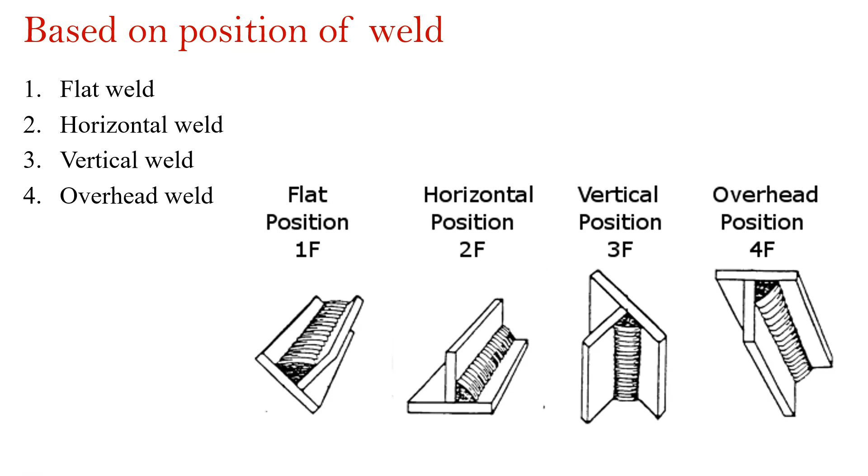The flat weld is when two plates are made perfectly flat, then you're going to make it. Horizontal position is when you're making it throughout the horizontal length, and vertical is when you connect two plates in the vertical direction, then you call it vertical weld. Overhead is when you are making the connection just beneath the surface of the plates, then it is called overhead weld. Typically these overhead welds are used for I sections or T sections.

Now, based on type of joint, you have butt joint, lap joint, T joint, corner joint, and edge joint. We have talked about the butt joint and the lap joint. The T joint is a joint which is in the shape of T, so you can find the web and the flange. Here you're going to provide the weld material throughout the length on both sides - one side, and along the other side also you're going to provide.

For the corner joint, you bring two plates corner to each other, and weld at the corner. This is called corner welding or corner joint. Whereas edge joint is when you bring two plates close to each other, and at the edges of both plates, you make the weld.

So these are the next three types of welded connection: butt, lap joint, T joint, corner joint, and edge joint. I don't think you need a detailed explanation of the T, corner, and edge joint. You might already know by seeing the terminologies themselves - T, edge, and corner.

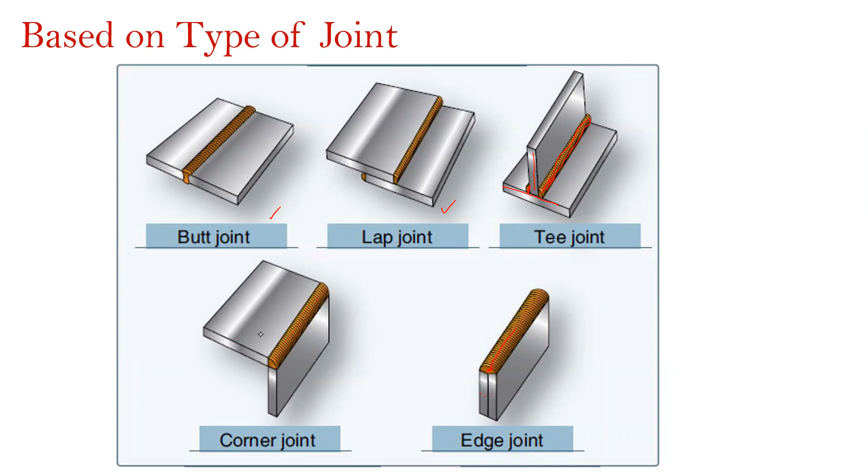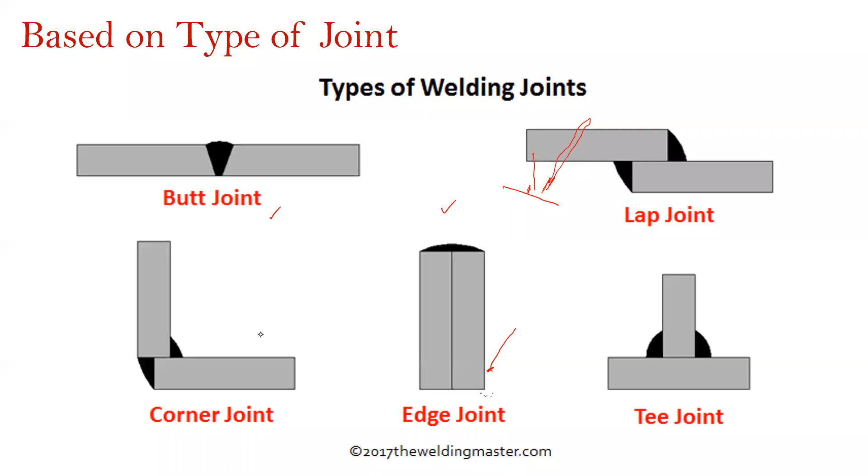Now let's look at the other types of welding: butt joint, corner joint, edge joint, T joint, and lap joint. Usually the fillet welds may be a single transverse fillet weld, double transverse fillet weld, or a parallel fillet weld.

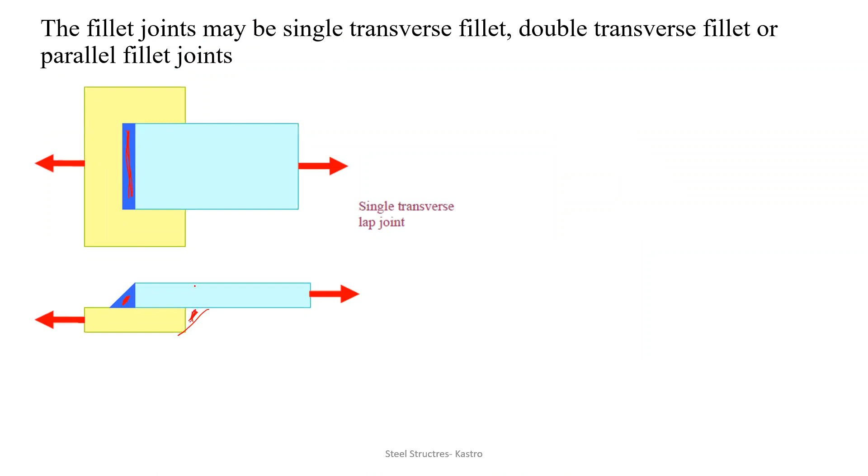The single transverse fillet weld is when you make the weld only on one side of the plate, either this side or this side. If you're making the weld only on one side of the plate, it is called a single transverse lap joint. Whereas double transverse lap joint is when you weld on the top plate as well as the bottom plate - here also you're going to weld.

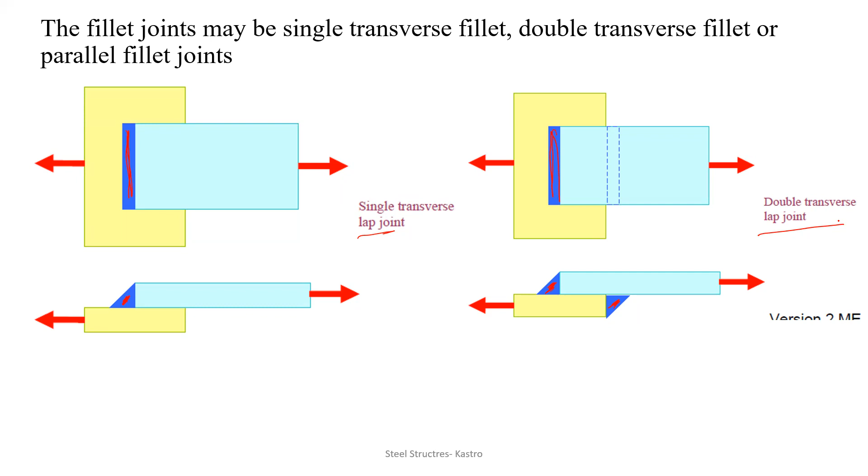Since it is not visible, it is represented with a dotted line. From the front view, you can see you're going to make the weld on the top as well as on the bottom, and hence it is called double transverse lap joint. So in single transverse lap joint, you weld only on one side, whereas in double transverse lap joint, you weld on both sides of both plates.

And the next one is parallel fillet joints. Parallel is nothing but you're going to parallelly weld the materials or weld the plates. That is the parallel fillet joints or parallel lap joints.

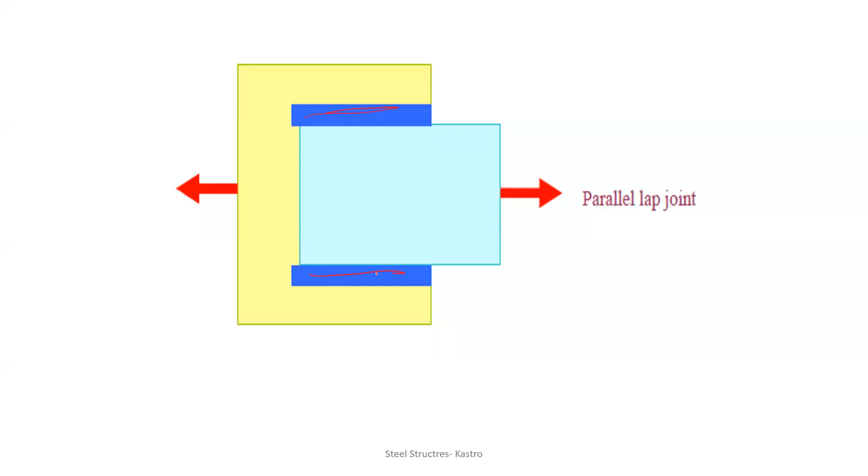I'll talk about the advantages and disadvantages of welded connections. Let's look at the advantages initially. Here we are not going to make any kind of holes as we provided in bolted connections. In bolted connections, we talked about the diameter of bolt - you have to make a diameter of bolt hole, which is D and D naught values. But here you are not going to make any kind of holes for the provision of welds. For that reason, you make this an advantaged connection - this is one of the advantages of welded connections.

The second advantage is welded joints are more stiff compared to riveted connections. Also, you are not going to produce any kind of noise during the process of welding, whereas in the process of riveting or bolting, you produce certain kind of noise. And welded joints are economical compared to riveted and bolted connections.

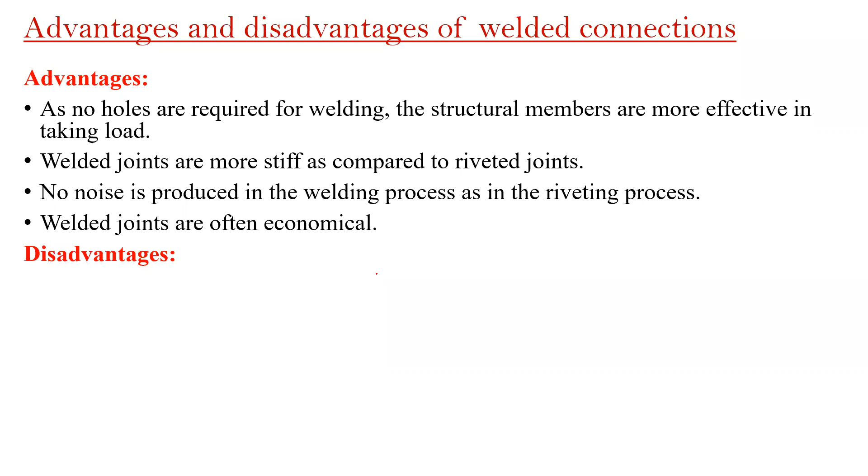The next thing is disadvantages: you need skilled labor and electricity throughout the process of welding - you can say this is one of the disadvantages. The other one is the inspection of welded joints is a little difficult and it is also expensive, because you need a skilled person to inspect the welded connections or welded joints.

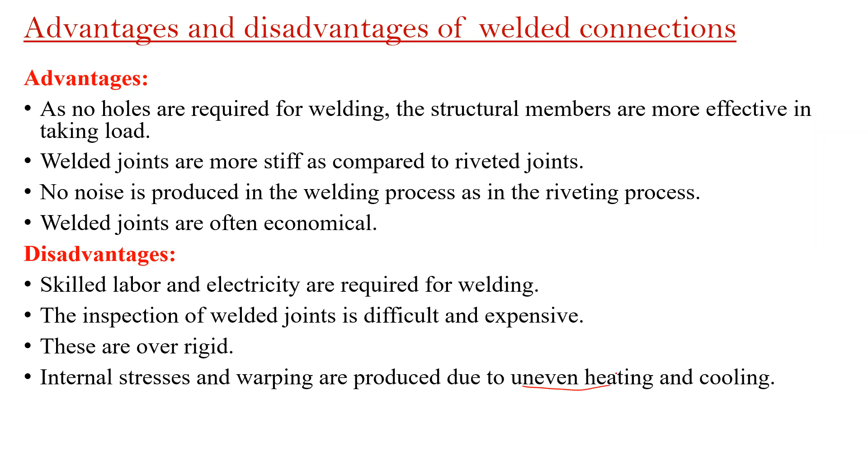And these are over rigid - you cannot break them very easily. This is also helpful in one of the ways, but internal stresses and warping stresses are produced due to uneven heating and cooling. What is this uneven heating and cooling? Suppose at a particular time, the heat of the weld material is, say, 1500 degrees centigrade. Over a period of time, this heat might get decreased - so this is uneven heating and cooling. Due to this, there are some internal stresses and warping stresses which are produced during the process of welding.